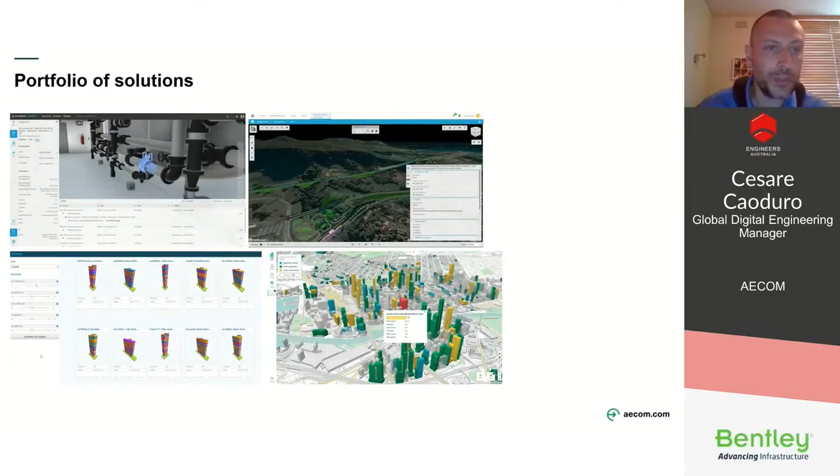It's all about harvesting this information, managing this information, attaching this information to a piece of geometry with different levels of detail. It doesn't really matter the level of detail at this point in time, but it's about being able to produce a representation of both geometry and information. Everyone is coming to a different place during the life cycle of the projects - some are in the concept stage, some are more in the construction stage. But at the end of the day, it's really made by three components: geometry, data, and representation of the data.

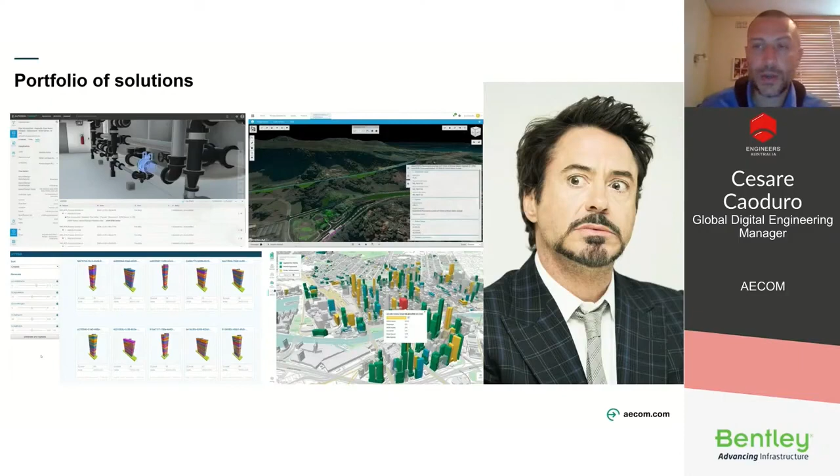For me, this all looks very scary because you can really tackle the problem from different perspectives. So I would say there's not a perfect solution to represent and collect this information. It's very project-related or very client-specific, the way you want to manage design information and present it as an end goal. So I'll probably concentrate a little bit more on the geometry side of things and on the data side of things.

So let's start with the geometry. For me, this is probably the biggest piece of the cake. You can't have a real digital twin if you don't have a geometry. And if you don't have data and you have only geometry, that's not a digital twin, because data is all about.

So let's concentrate a little bit on geometry. I'd like to talk about computational design and how we can use it to speed up the process of creating geometry towards the idea of having a digital twin. We'll focus specifically on structures, so I'm very civil infrastructure biased. The two examples I'm going to talk about are around retaining structures and tunnels.

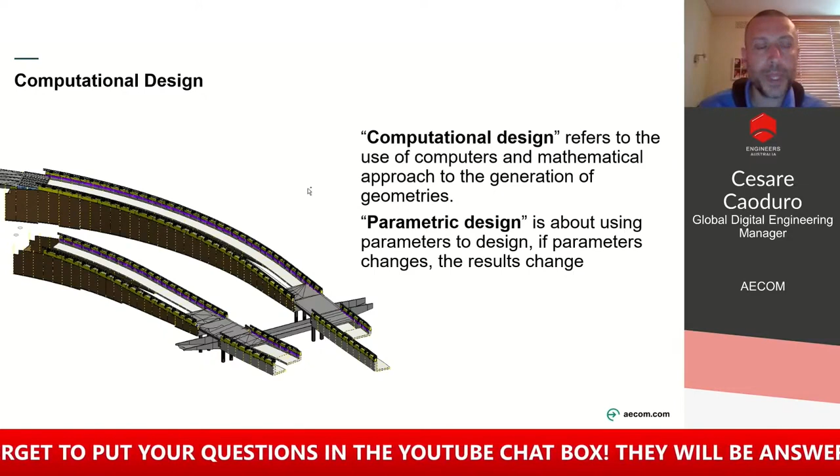Both of them coming from well-known projects around Australia. I can't really mention one of the two projects, but it's not relevant to this presentation.

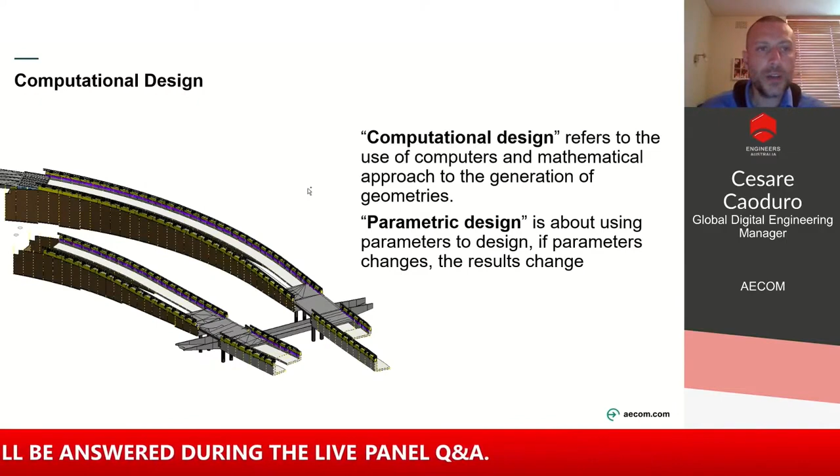So for those of you not really familiar with computational design, what is it? This is really another buzzword like digital twin these days. For me, computational design is like back in the days with a calculator. You have numbers on one side, you type those numbers, you have an equation on your calculator, and then you get numbers on the other side.

Computational design or parametric design, depending on how you want to express the constraints between geometries, it's literally the same thing. You have numbers or geometries on one side, then you have a black box with rules, constraints and mathematical equations, and at the end of the day you get on the other side some other piece of geometry or some other piece of numbers. So it's having inputs, some manipulation of those inputs, and then on the other side you get outputs that can be inputs for another piece of the workflow, or can just be the end result—think about, for example, a structural analysis result.

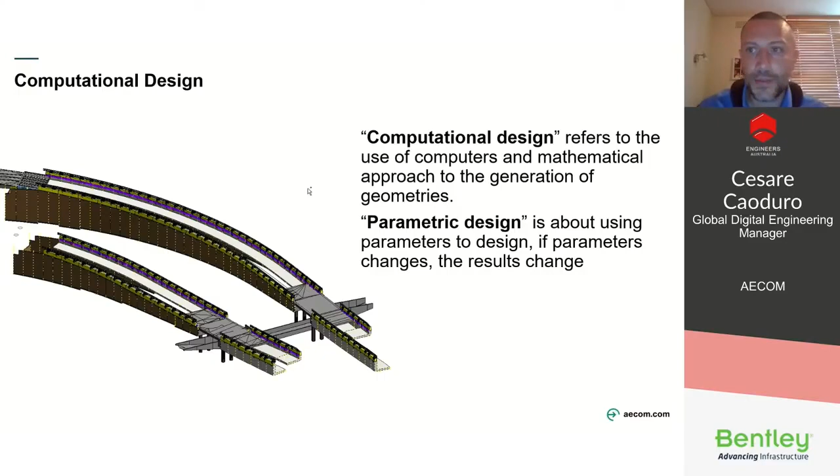There's different platforms and different ways to approach computational design. There's definitely an easier way, which is around using visual programming. Visual programming today is very popular, becoming much more popular within engineering firms. It's really being able to use building blocks graphically to build complex workflows.

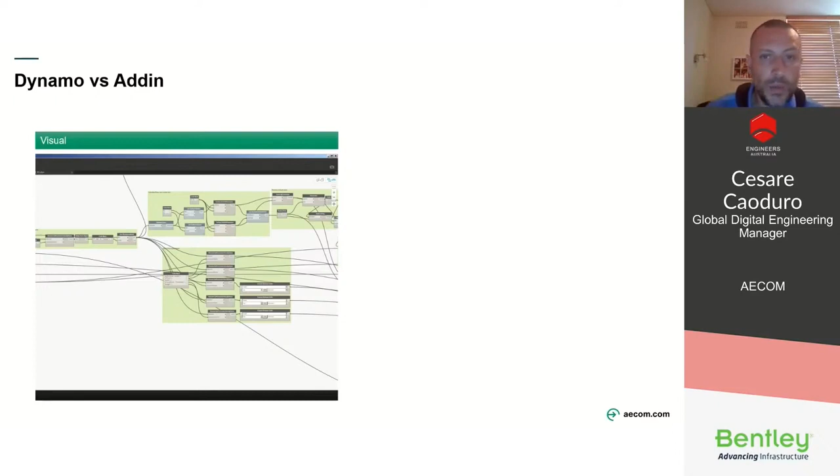If you think about an equation, you can have your variables, then all your rules—addition, multiplications, whatever the rule is going to be—and then on the other side you have the equal output. Instead of writing that with a very complicated formula, you can use building blocks and connect those with connections. This is a typical example of a visual programming workflow, which is much easier to understand, read, and extend compared to traditional code.

You can still have traditional code within visual programming, but it's definitely less compared to a fully fledged traditional plugin. So there's an easier way—the learning curve is less steep compared to programming code, and it's much more visual. It's easier to understand even when you come back after a few months on the same workflow.

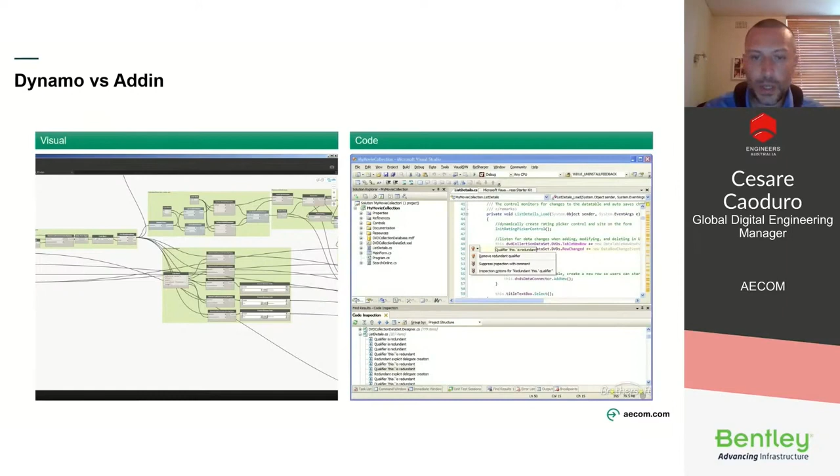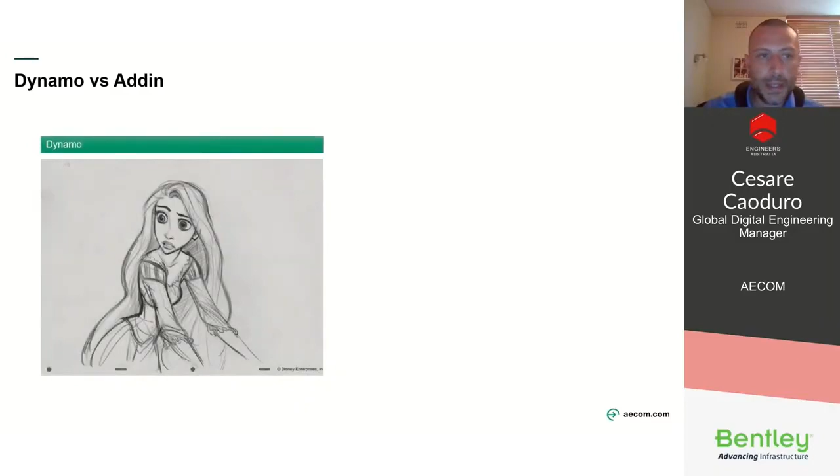So let's talk about this now if we move to the next slide. For me, using computational design and visual programming is literally like sketching on a piece of paper. I love this slide because it really represents the full idea.

Visual programming is really sketching with a pencil. Once you're happy with the sketch, you can move into a more production environment and build a plugin using a programming language like C# or Python or whatever it's going to be. But the difference is, when you're within the visual programming environment, making changes to your workflow is much easier than making changes when you have a fully fledged coded environment. So that's the full idea of using this slide.

What I'd usually like to say is that when you have great powers, that comes with great responsibility—and by the way, that's not from Spider-Man, it's from a French writer called Voltaire. Spider-Man just borrowed it. And everything looks impossible until someone does it, which comes from Batman. As you can imagine, I'm a huge fan of comics.

Computational design is very powerful, but it comes with complexity. You can use computational design to solve very complex problems in engineering—like parametric geometry modeling, form finding, automating design processes. Think about panelization in very large and complicated facades, high-rise optimizations when it comes to buildings, and of course structural facade engineering.

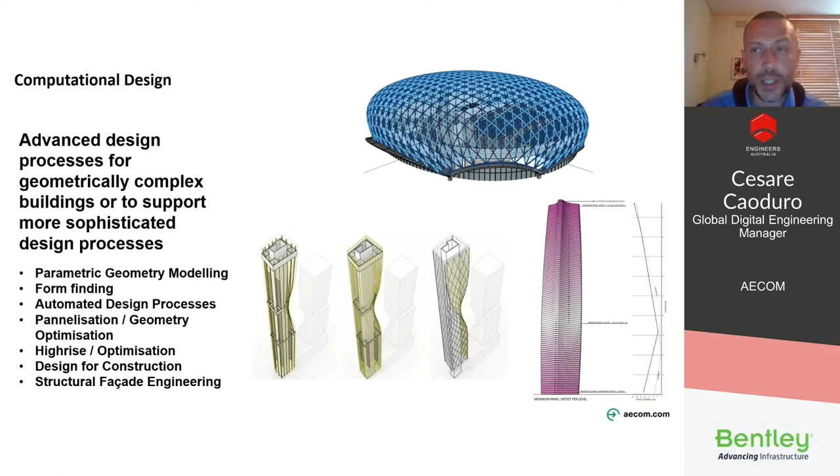Going back to the process, it's very simple. You start with some design idea and criteria, then you go into the engineering piece of this design criteria, then you move into more detailed modeling. And at the end of the day, we all want to see drawings and models coming out from these models, driven by data within the process.

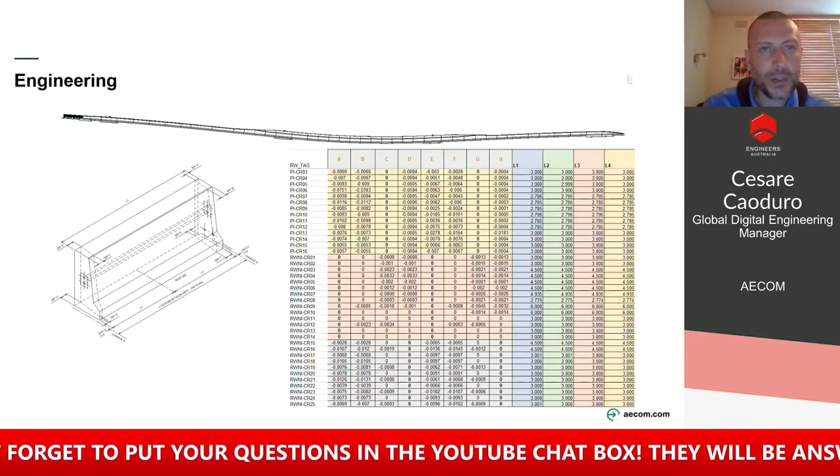For me, this is really another interesting picture that defines the transition from what was the world before computational design and smart objects, and the world that we are moving towards now with digital twins and smart objects.

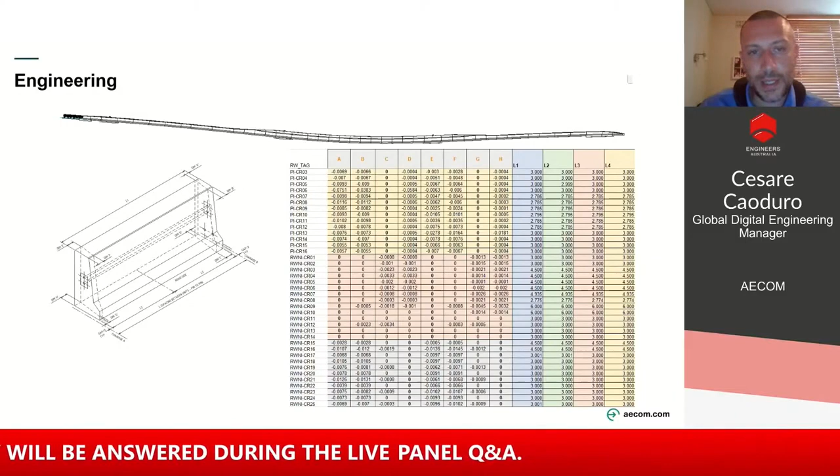The picture here at the bottom right is an Excel spreadsheet. Who doesn't love Excel? We've been running projects for years, and we're still running projects and structural analysis literally based on Excel. And Excel is an example of a digital twin, because it contains information about geometries, about assets, about location, all types of information. At the end of the day, you can present that information in a very simple form of a database, because Excel is a database at the end. It's not relational, it's not a complex database, but it is a database.

What we're moving towards is more the object on the left side of this slide, which is a smart object. The smart object includes all the relationships that we have built into thousands of Excel spreadsheets, probably in just one single object. So the object is clever enough to understand how to stretch and how to flex depending on engineering criteria.

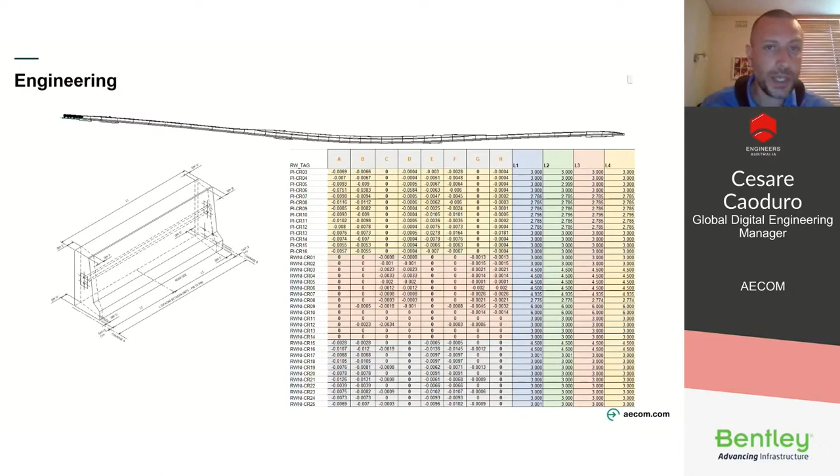Then, using computational design, we can put together more smart objects, and they can all be combined into complex structures, and then provide the right information for different stakeholders, being structural engineers, project managers, or construction managers, depending on who is looking at the model from a different perspective.

So those are some examples, some screenshots of computational design modeled objects. That precast barrier you saw in the previous slide was part of a bigger picture, a bigger model that includes maybe hundreds of precast barriers. As you can appreciate from this slide, they all come with very different geometries, different constraints, different locations, which at the end of the day is the geometry within a digital twin.

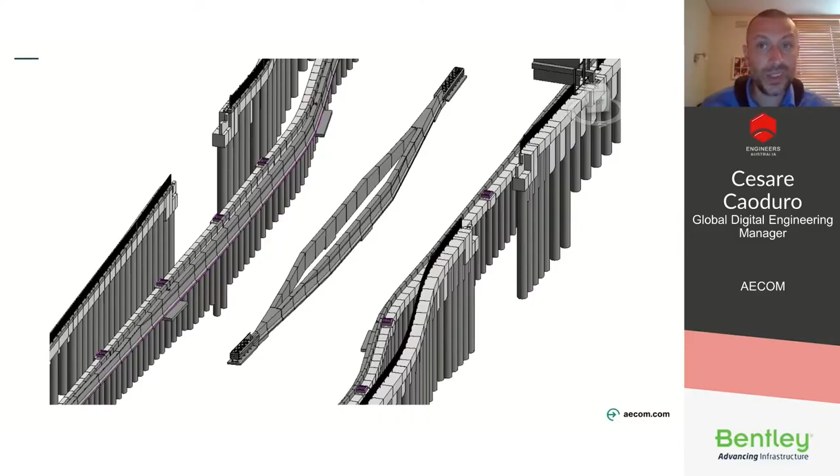The geometry piece of it is basically the representation of that geometry and all the data attached to it, which again will feed different stakeholders depending on the use case you want to get from a digital twin. Those are, again, other examples of retaining structures, all driven by computational design.

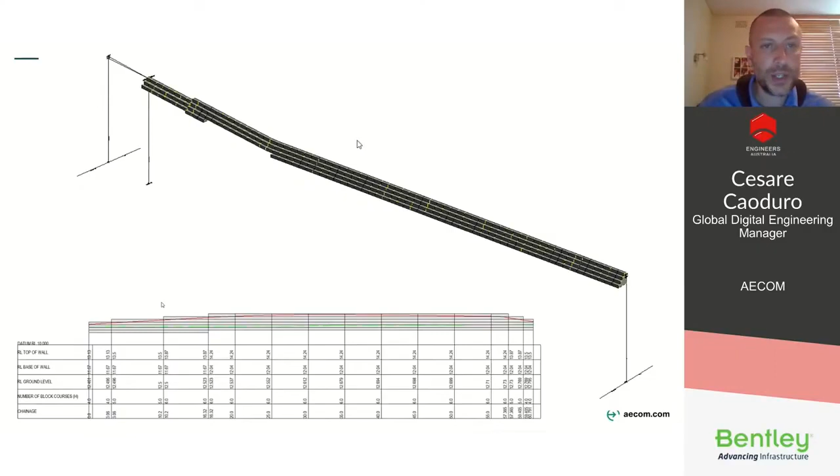At the end of the day, the engineer wants to take some of this information into a developed elevation that might be just good enough for a structural engineer to make some adjustments to the structure, or to get some idea of the structure itself.

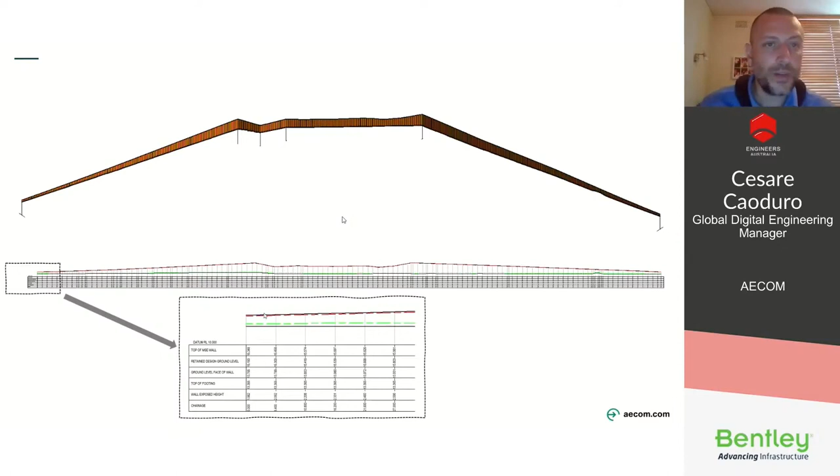Again, another example: this is a retaining wall made out of panels, an RSW type of wall. Same idea - the beauty of it is that now we can get a developed elevation pretty quickly from a model as soon as there's a new design change, which wasn't really possible with traditional methods. At the same time, that model is georeferenced, and we can use it for collaboration, coordination, and eventually finding interfaces with existing structures.

This is another example of a complicated RSW, which transitions into an L-shaped wall and then finishes with a barrier footing wall. You can see there can be huge complexity in terms of shapes and in terms of information attached to it.

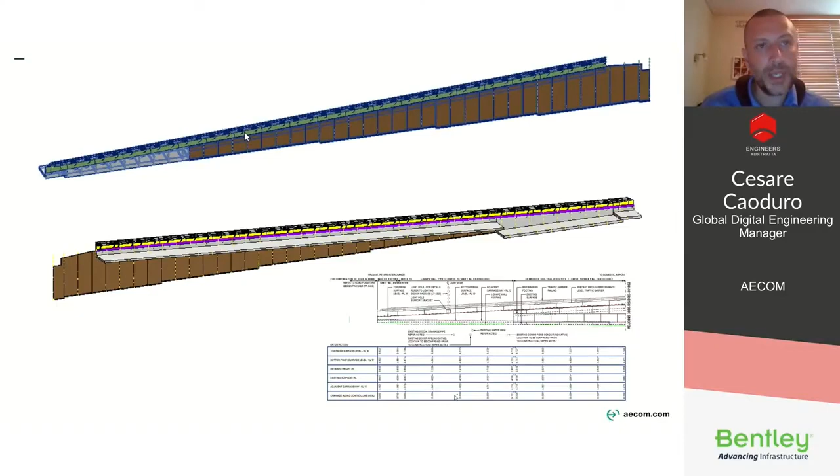So each one of these single panels can be tagged, can be quantified. Each single precast barrier can be quantified and tagged, and also all the railings on top of the barrier can be quantified, manufactured, and then shipped to the construction site with the right information and just installed. Each single barrier comes with anchors and bolts information, which again is part of the big piece of data coming together with the digital twin.

And finally, drawing production. Drawing production has always been completely separated from the model. But what we're trying to achieve today is that drawing production is connected with the model. So whenever we change the model, we get a new drawing out, and we don't have to use drafting time to go and manually change text and information, because 80% of this information, I wouldn't say 100%, but 80% comes straight back from the model as a tag, which is the clever and smart way of demonstrating text.

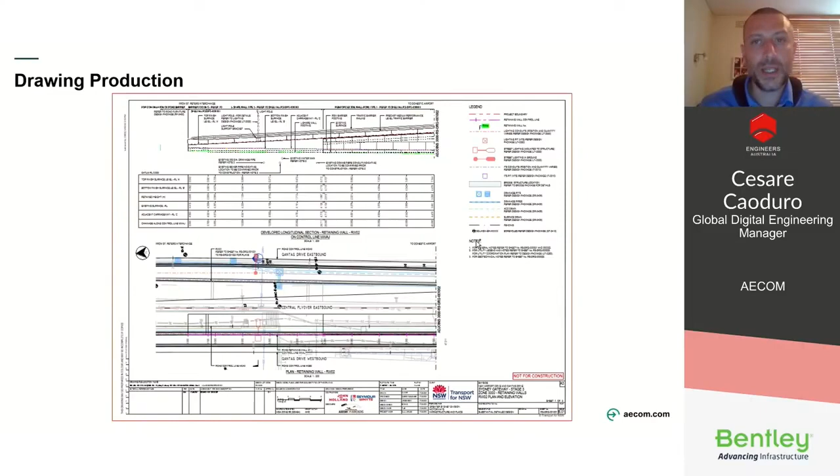So if we change the size of the footing, the associated dimension on a drawing will change accordingly. The volume of concrete, for example, will also change in another spreadsheet or dashboard for the project managers or procurement manager. So everything is well connected, and the model is literally the single source of truth where we attach all this information to.

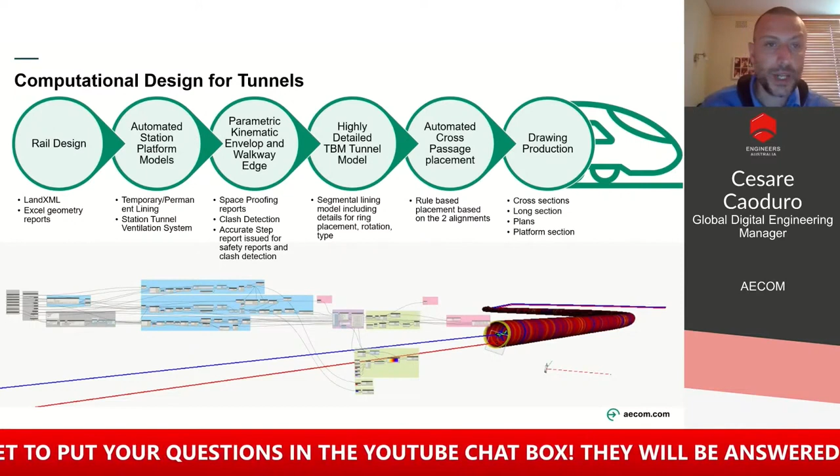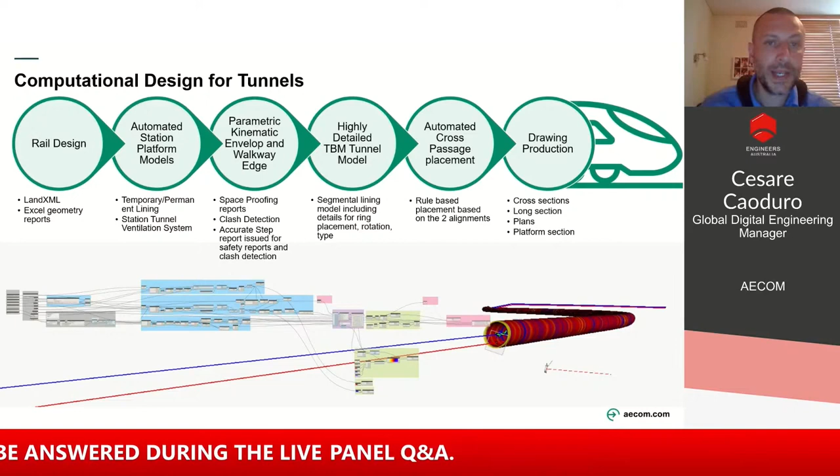So let me give you another example of computational design, this time for tunnels. Again, the process is very simple. You start from the design of, this is a TBM tunnel, and it's a rail tunnel. So you start from the design of the center line of the alignment, and then you come up with the digital representation of the tunnel, which then can lead to different use cases. We use parametric design extensively to iterate the process of creating multiple options of the same model and then extract information from it for different stakeholders.

This specific model was the platform of the station made out of caverns. The main goal of this model was to verify the tunnel ventilation system requirements, which wasn't really possible just with 2D drawing. So we extracted a portion of this model at a different level of detail to provide to the tunnel ventilation engineers to run their calculations and CFD simulations.

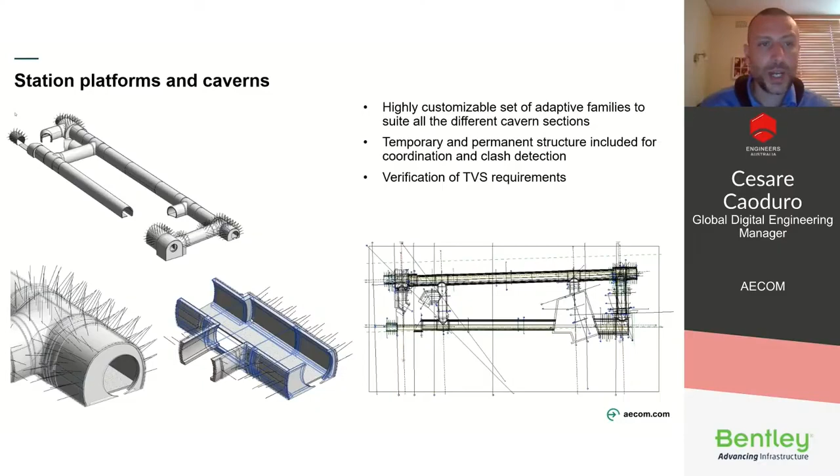But the same model was used by the construction team for staging of the construction and to understand exactly the breakthrough of the TBM, and to simulate basically the TBM passing through the station.

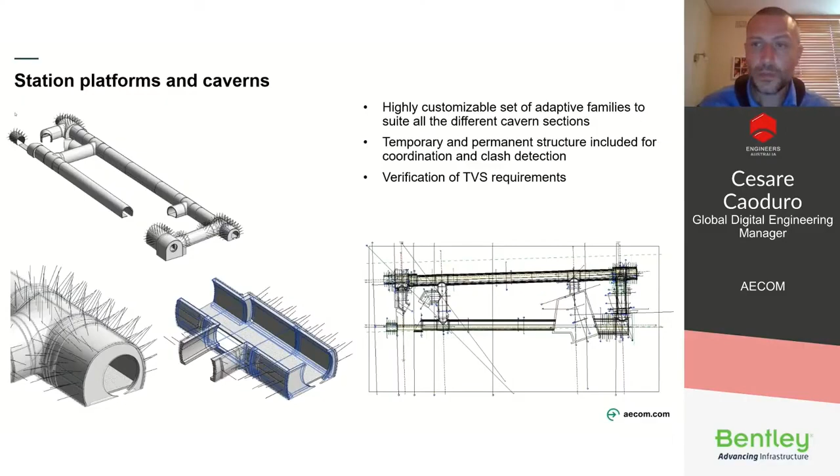So this is an abstract of the TBM tunnel, and the TBM is complicated by itself. The way the rings are placed, the way the rings are modeled, and the information associated with each ring is probably worth a separate webinar by itself.

So we use this to, I would say, mimic the idea of the TBM. Using computational design and a very high detailed model, we have identified the ideal trajectory of the TBM, for different reasons. One being finding interfaces with the existing foundation of existing buildings. Another was to identify the possible location of cross passages and try to minimize as much as possible what would be the ideal path of the TBM.

We all know that the TBM will be corrected and adjusted throughout the process of excavation, but at least this will give us an estimate, used in conjunction with a geotechnical digital twin model. This will give us an evaluation of the different materials we are going to excavate, and eventually we will understand what will be the timing of excavation of that specific portion of the tunnel.

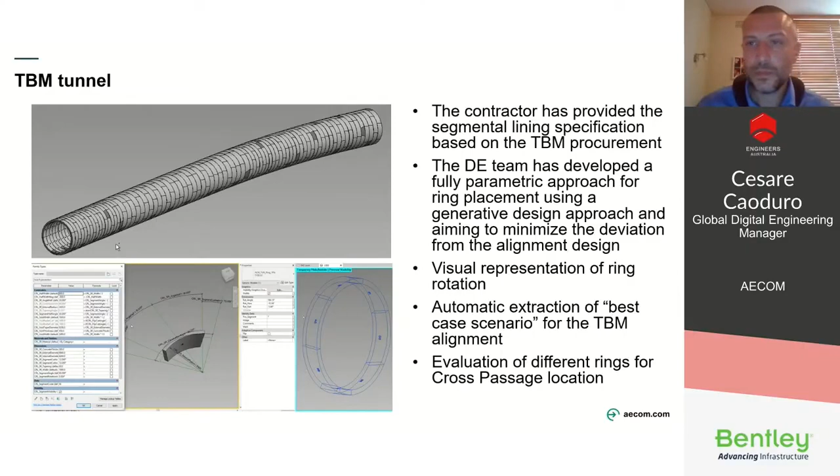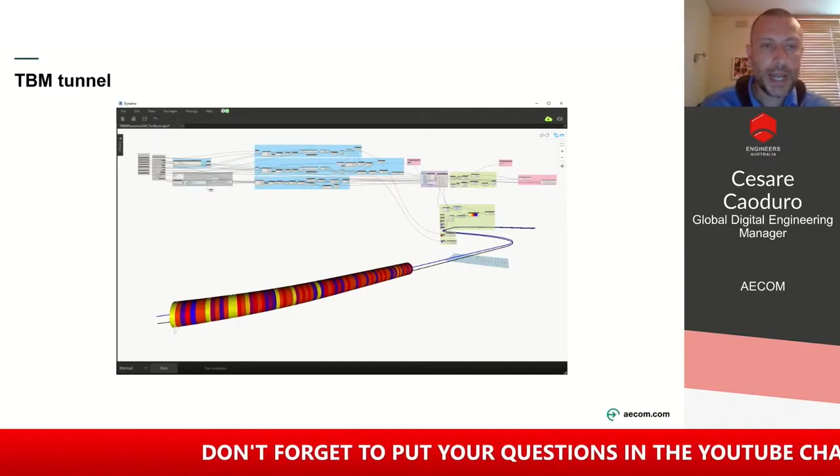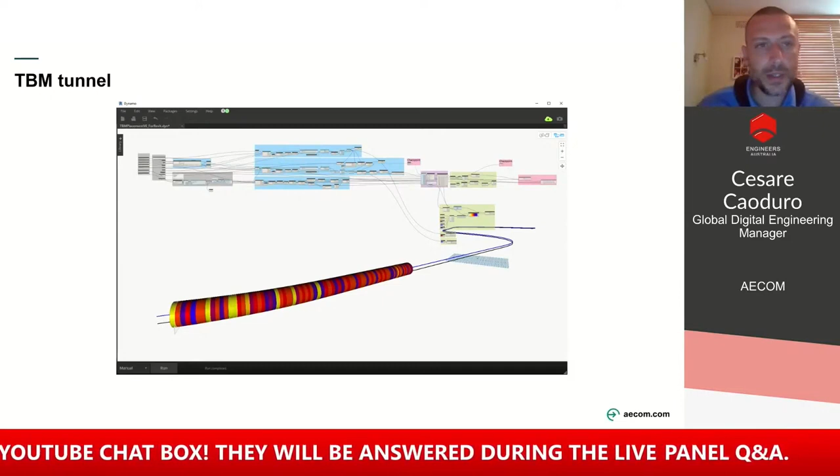So the colors here are not just fancy colors. They give you an idea of the different rotations of the rings and the positions of the rings based on the possible rotation matrices of these segments. But the main idea is that you want to minimize the deviations of each of these rings from the design center line of the tunnel.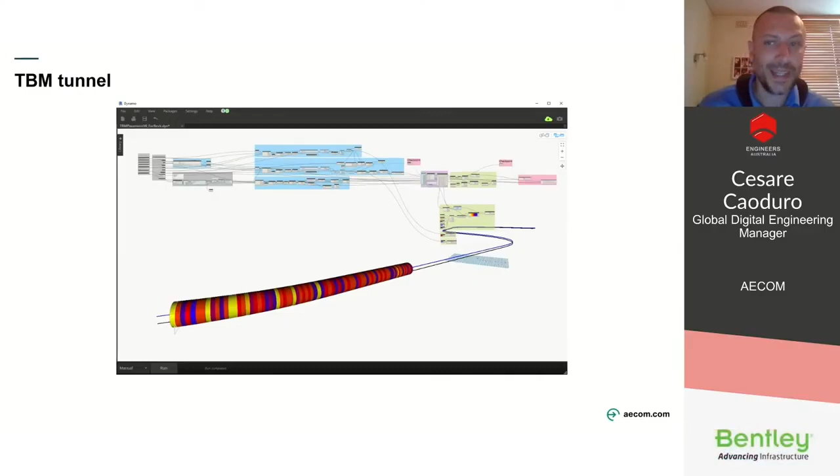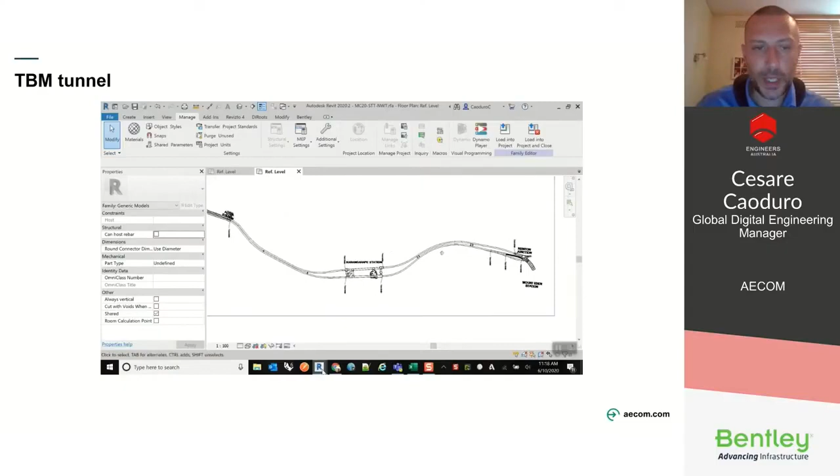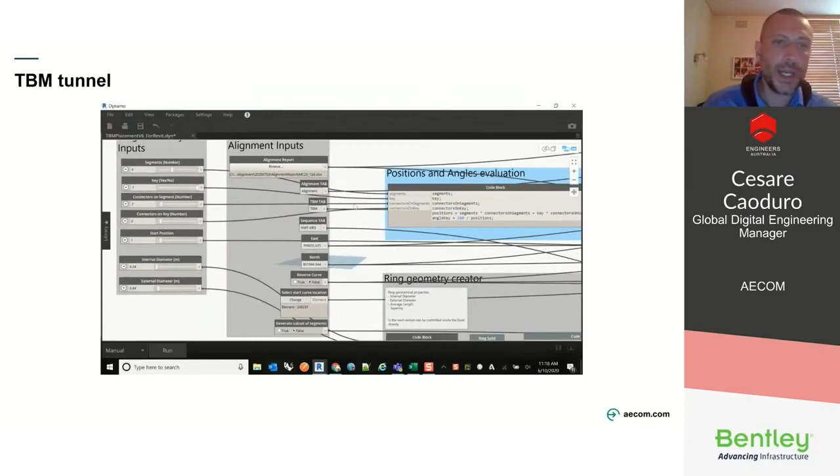So this is a very quick video. I'll probably go fast on this one, but the main idea is again presenting what it looks like to be a very complicated solution through visual programming. This is all a spaghetti connection, but at the end of the day, you really want to change a few inputs, which usually are on the left side of the workflow, and then you have loads of magic happening in between, which eventually are just mathematical or geometrical rules. The flow goes always from left to right, and on the right side of the flow, you'll find all your outputs.

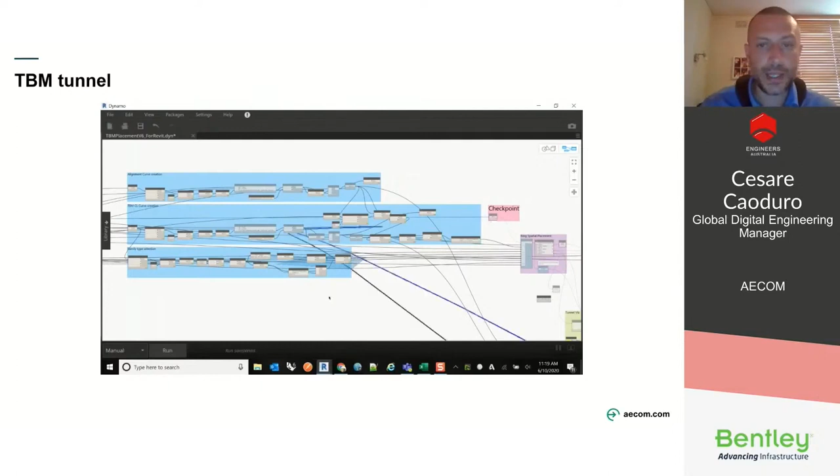Again, those can be just simple numbers if it is a report, or can be other geometries. In this specific case it's the tunnel itself, the model of the tunnel. But then it comes with all the information attached to it.

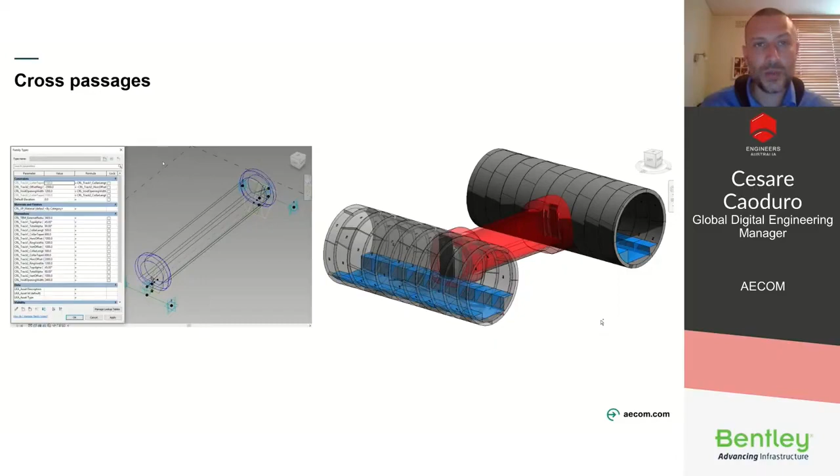Cross passages are another huge problem. You need those cross passages, especially with a twin tunnel connection, and you need to place them at specific distances. You also want to excavate them and cut the existing rings in the best location. Using computational design driven by rules, we could identify the best position for cross passages, identifying a cut of 5 rings as an average, and then determine which of those rings would best fit the cut in terms of location and type. Again, it's all rules that engineers have in their minds, just translated into algorithms the computer can understand and manipulate.

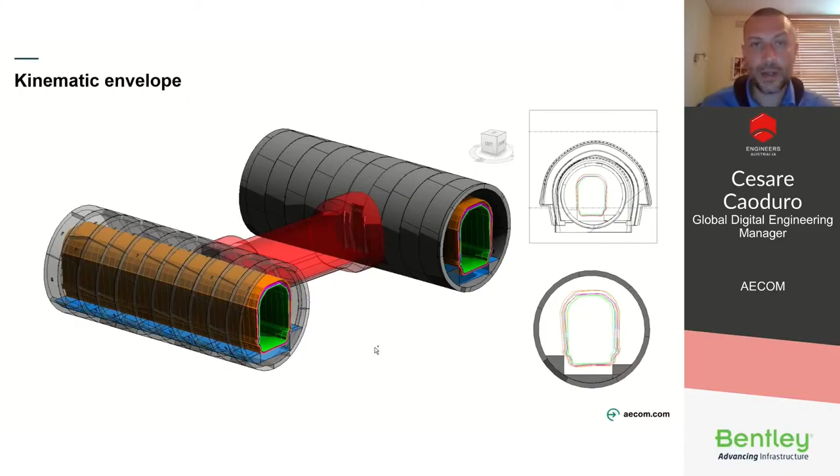Another use case was the kinematic envelope, demonstrating that the rolling stock fits within the tunnel, with no interfaces with MEP. Most importantly, this also helps understand and design the walkway based on the location of the kinematic envelope. Again, all driven by rules, geometries, and data, because at the end of the day we exported a report of the walkway set out.

So let's briefly go into data. This is the biggest piece of the digital twin, I would say. We can have a digital twin without some kind of geometry, and we could have a digital twin with no geometry, but we definitely can't have a digital twin if there's no data attached to it.

Briefly touching on data, we're looking for specific areas when we think about data in the digital twin environment. We want a place to store data, which can be a proprietary platform or an open source data repository. We want to understand data versioning. We want to collaborate on this data based on different stakeholders having different reports. We want interoperability, not only across different personas but also across different companies, especially in large joint venture setups. And we want this data as structured as possible to run business intelligence on top of it, such as construction reports, progress reports, or other report types. We may also want to collect sensor data attached to our digital twin.

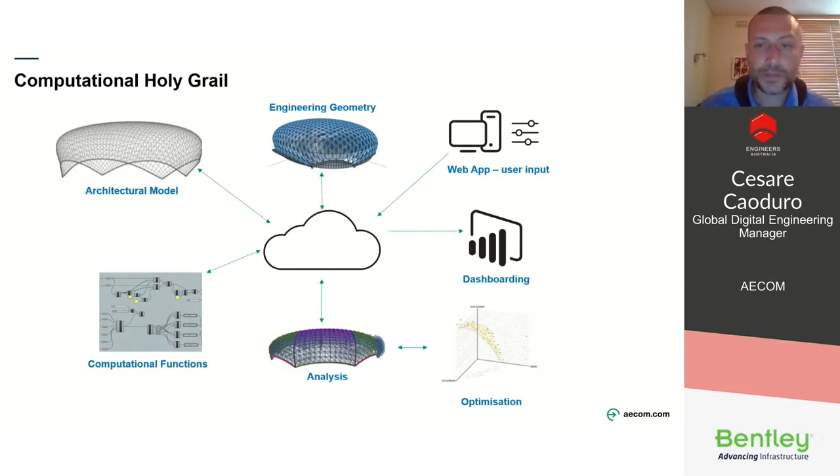So from my experience and lessons learned, computational and generative design are really here already to reduce what I like to call the time to market. Every time there is a design change, we need to produce new information, new geometry, and publish that information and geometry. So computational design can definitely speed up this process.

I would say that designers and engineers having these digital twins in their hands can take more informed decisions. For me, really the model is not anymore the end product, but is the input product for all of these design processes. Sometimes it's not cost effective, and I can get that.

So the first project definitely needs more investment in terms of setting up these environments and workflows, training the people, training the users, and providing the awareness that this is the right way to do it. And then, of course, documenting properly the processes and training and upskilling the users to take into account these new ways of designing.

It's really important - I like to call it always keep it simple. Just to mention something from the beginning of my presentation, always keep a good balance. I saw multiple times creating very complex algorithms, very complex coding, very complicated workflows, but very difficult to change, very bespoke for a project. So try always to break it down into simple steps. Try always to make the algorithm look simple and build your building blocks to then build complex algorithms at the end - this makes it a lot easier to change along the way.

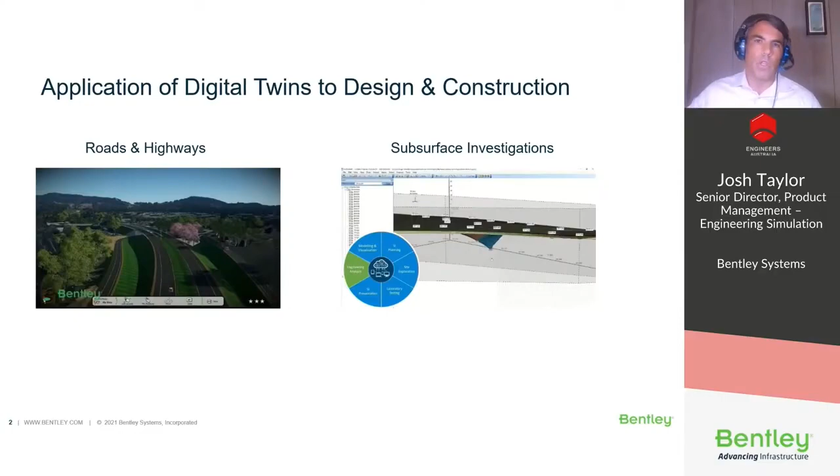Taylor's used the reality captures generated with the ContextCapture product to add the reality meshes to a custom web application that they created. One idea we can take from all of this is how a digital twin is applied to and used by a given construction trade or engineering discipline is still pretty wide open and evolving quickly.

There's something I'd suggest is a little different about the digital twin than BIM or CAD. When we unpack what's important about it to each construction trade or engineering discipline, we're probably going to find differences in what's important to each of us. The information most useful to each trade may vary. The journey we're on is to determine what's the most important data in making structural engineering decisions that impact design, construction, operations, and future renovations or expansions of infrastructure assets.

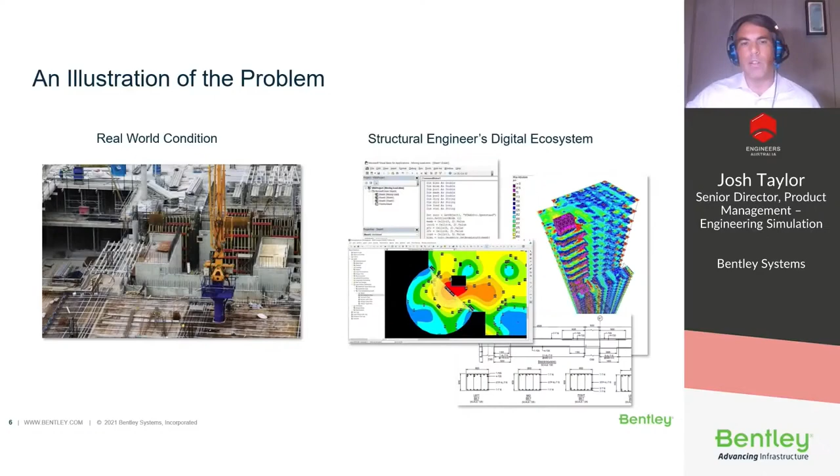So we would propose a digital twin can be this central source of truth and can bring this information together. More specifically, some of the questions that the digital twin can help us answer are: where can I document my engineering decisions so that they are recorded and visible to everyone that needs to see them?

Are they handwritten notes just on calculation sheets? Are they a collection of emails? Is there a better way to organize that information? How has the structural design evolved over time? Do I have a clear enough and detailed enough history to know why changes were made at different stages along the way? Third, do my structural analysis calculations reflect reality?

Are the dimensions, the member properties, the applied loads in my analysis models indicative, within an acceptable margin of error, of the working master model? And then finally, how do I convey my work to those that I am working with?

So with all that being said, what are the ingredients of good technology that would support this process?

First, we want a data-rich 3D model that we can easily navigate. We would like to create custom views of the structure, do walkthroughs, and toggle on and off different structural systems within the model so we could isolate a single floor or a specific framing system and focus our attention just on that part of the structure.

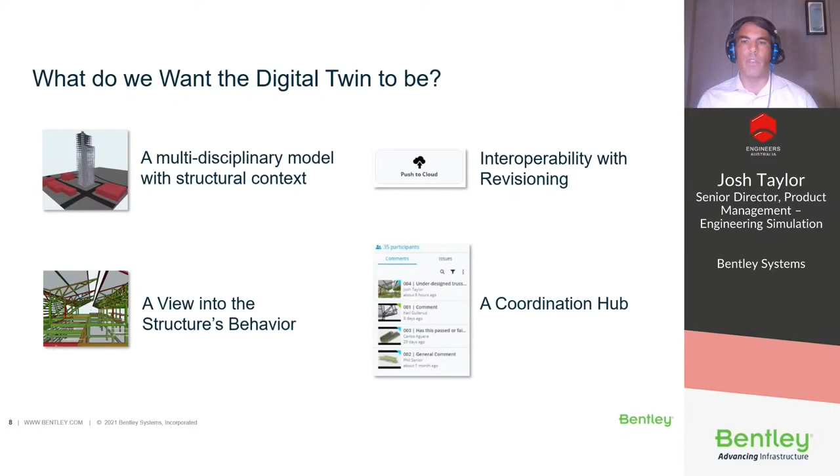And finally, a means of communicating and coordinating with one another in the context of a 3D model where our decisions can be documented.

The platform that Bentley provides that makes this possible is ProjectWise 365. This is really the central point of collaboration where the digital twin exists and all the stakeholders on a project contribute to and interact with it.

It is hosted on a web browser, so there's no special software that needs to be installed to take part in the collaboration or workflows, other than the desktop products you're already using. You just need to be given access to the project by whoever is administering it.

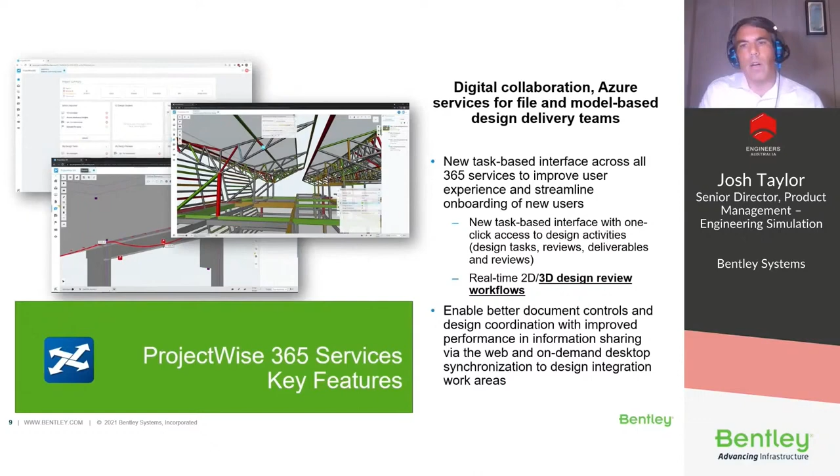There are several facets to ProjectWise 365, but I'd really like to narrow in on the model review and give a feel for how the engineering analysis models that you create are utilized in this environment.

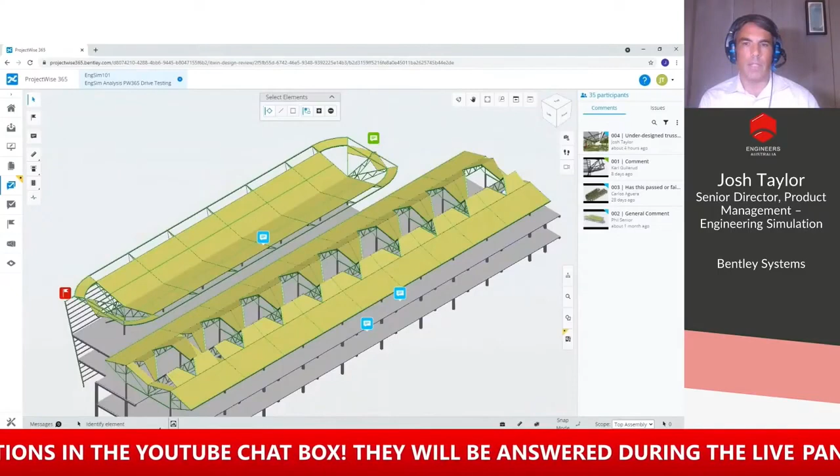So let's take a quick tour of the experience in ProjectWise 365, focusing on the model and design review aspect. This is the ProjectWise 365 site, and we're looking at a structure that we modeled and designed in STAAD, a rail station in this case.

It has been converted to an iTwin and includes analytical results, and that's key to the workflow here. I have a few different saved views that I've captured, so I can get to what I want to look at very quickly. These views can have whatever portion of the project or structure you're interested in isolated.

The analysis software like STAAD or RAM is able to classify the different parts of the structure so that you can easily get to them.

So let's do a quick walkthrough down the boarding platform here, and I'm going to stop eventually and pan over to this little blue comment icon attached to the truss on the left-hand side. This is actually a link to a conversation I've started that all other team members assigned to this project can see and reply to.

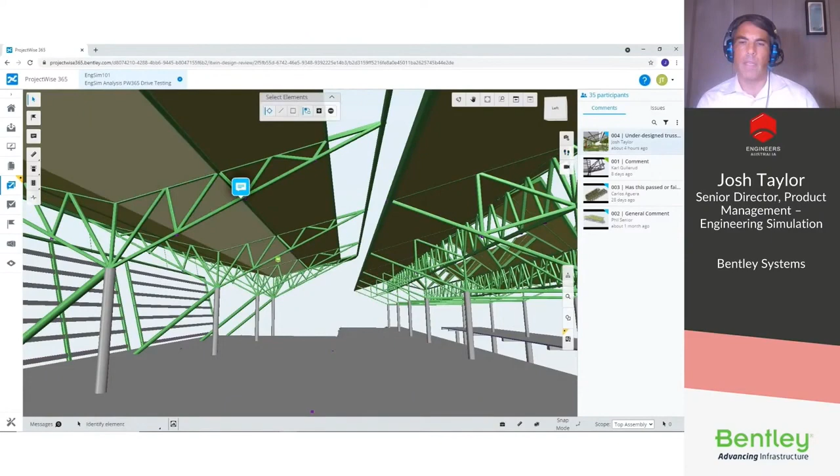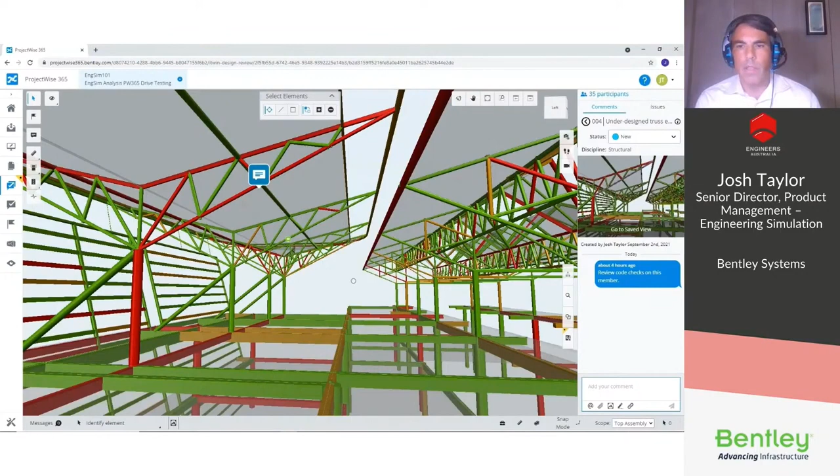When I select it, I see the conversation thread pop up on the right-hand side. You'll also notice the elements in the structure turn to a range of colors. These colors represent the utilization ratio of these members as they were designed in STAAD using the steel member design feature. This is the context-specific information we can query here in the digital twin.

There is an analytical-specific menu we can access where you can display whatever information the desktop application has handed to it: the controlling design clauses, the controlling load combination, and the utilization ratios. Again, this information will change based on whatever publishing application you're using.

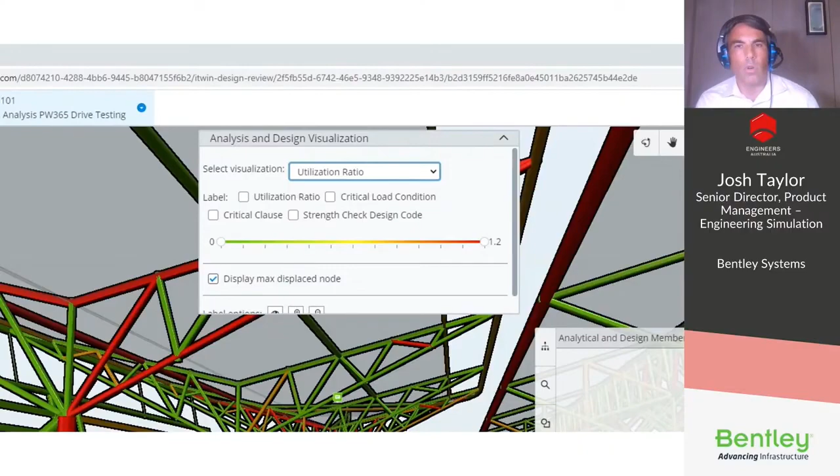So if you were designing a post-tension concrete floor in RAM Concept, you'd see results on the PT design available. If I click on an individual member here, I get a window showing more specific information, such as design loads and more specifics on the design parameters. So you can very easily investigate individual members and how they're behaving within the overall model.

Now, going back to the question of what we want the digital twin to mean for structural engineering, this is the view into the structure's behavior. And if you think back to that building site we were looking at, this allows us to more easily answer the question: how much reserve capacity do we have in the system?

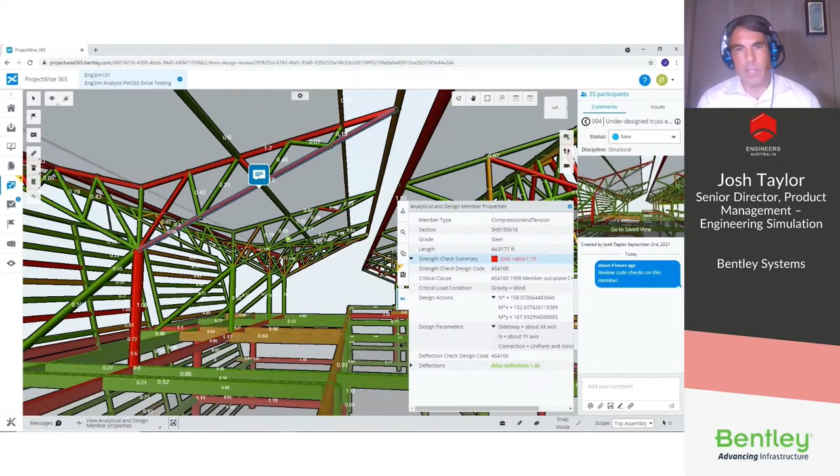What parts of the structure would be sensitive to construction changes? How easily can future expansions be accommodated? These are all easily answered and reviewed by anyone in this type of environment, which really does a lot to democratize the engineer's information and makes it far more accessible.

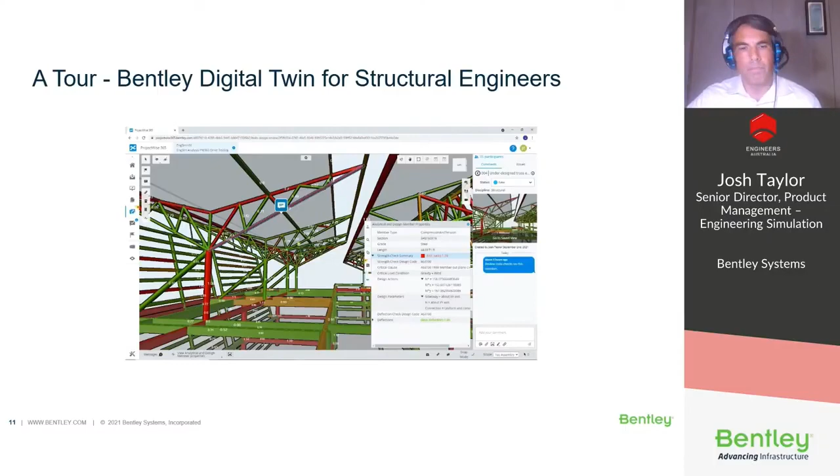There are also simpler ways that we can use the review tools here, in more of a classic design review context. In this screen grab, we're color coding each of the elements in the structure according to their section profile. This gives a reviewer, perhaps a project manager, a principal, or a building department reviewer, an easy way to validate the assumptions made by the design engineers in the analysis models. That's another example of what we mean when we say the information is no longer hidden. What otherwise might be tucked away on someone's desktop is now front and center and available for back checking.

Note that really any of the quantities in the menu here can be color coded. So as an example, another useful application of this might be to check the material strength assumptions in a multi-story building construction, to ensure that the concrete grade is consistent with what is specified on the drawings.

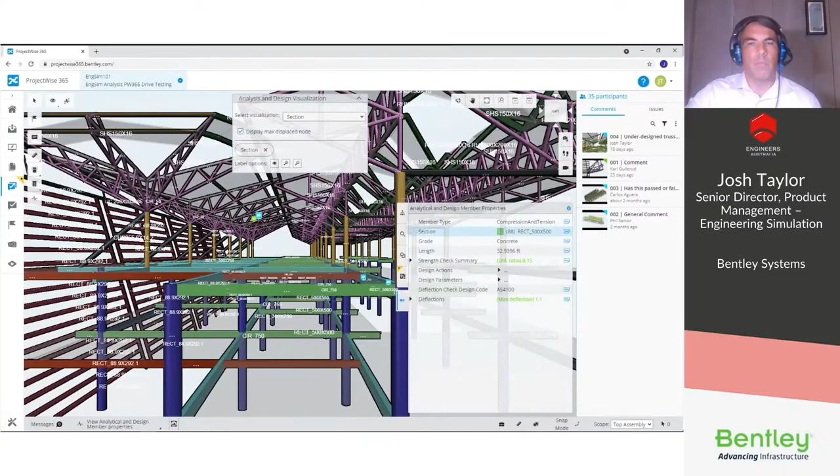So you might ask, how did we create the digital twin in the first place? Well, it can be created directly from the RAM, STAAD, or MicroStation models that you've created on the desktop. We tie the desktop programs to ProjectWise 365 with a common interface, which you see in the center of the screen. This accompanies the desktop software and manages the communication between the analysis model you're working on and ProjectWise 365, where the digital twin lives.

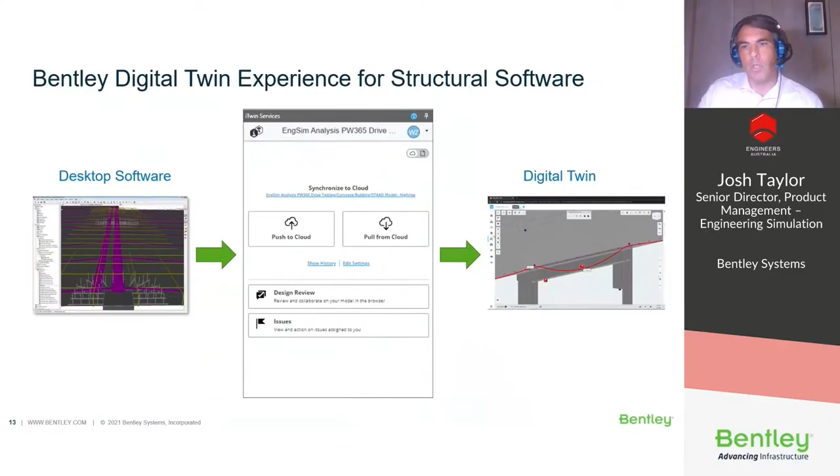You publish the model simply with a push command, and since the workflow is inherently bidirectional, you can also pull from the digital twin back into the analysis program.

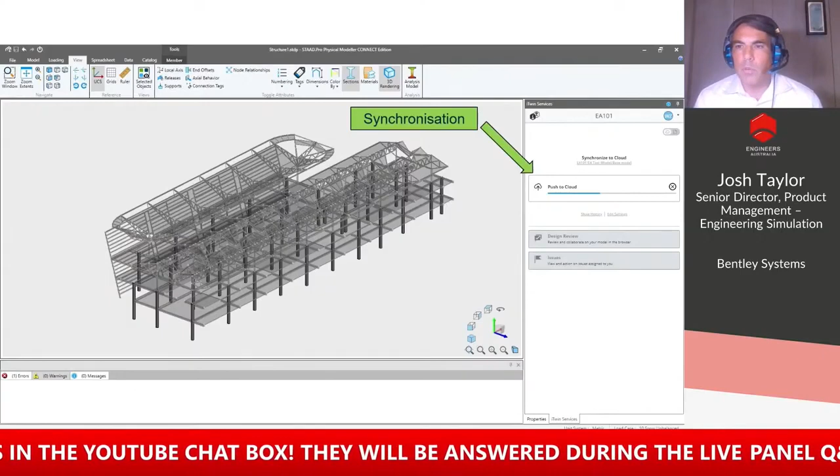So I'll show a simple sequence here on how the push and revisioning works. Suppose that in this STAAD model, we upsize the structural columns at the bottom of the model. What we would do is simply save. After we've rerun our analysis and rerun our design checks, we'd do a save, then press the push button in the little widget on the right-hand side here, and this will update the digital twin.

If we'd like, we can review at this point how the new and previous models compare to one another before we actually commit the change. This is an intermediate interface you can bring up if you'd like to do differencing on any two states of the model over time. The color coding tells you what elements have changed, and the details are shown in the pane to the left.

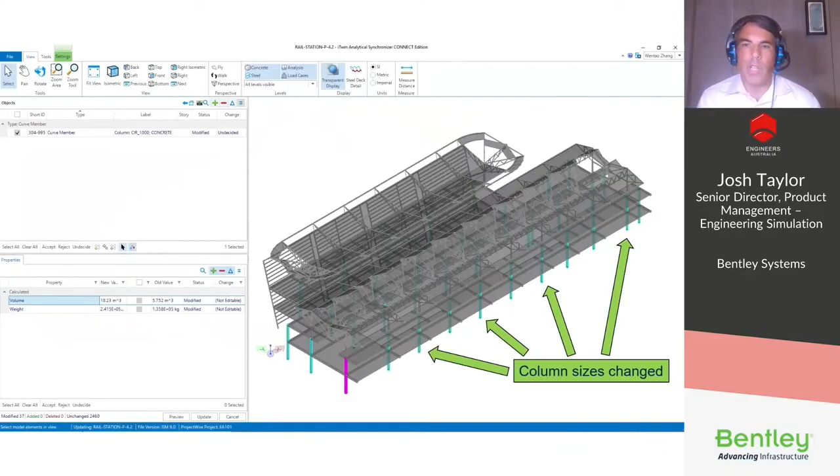And you can be selective in what you want to push to the digital twin. If there are changes you've made in the analysis software that would be superfluous to other disciplines, you can simply reject those specific changes and commit only what's needed for the entire workflow.

I think it's worth reviewing the change management aspects of this a little further. This is a very important and powerful ingredient in this technology. Each time a push is done from a desktop program to the digital twin, it's updated with a revision state. And this is more than just a marker—it's actually a model that we can recover and roll back to anytime we need.

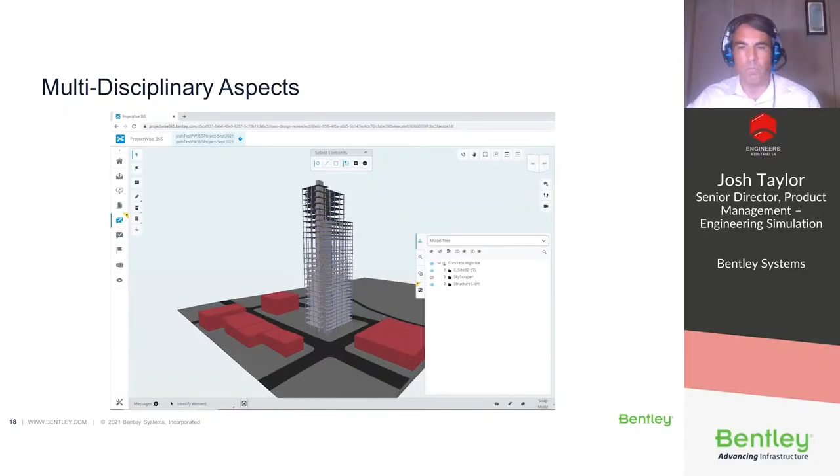So what are the key takeaways of all this? Well, I think the first is that the digital twin, as we see it, can really expose structural engineering data that is more important in decision making that really is otherwise hidden in our day-to-day work. And while this information can be a range of things, we believe one of the most underutilized sources is analytical and design information describing the structure's response under loads and compliance with building code checks. And with a set of applications that are well integrated with the digital twin, we can use this information in more ways that are useful to structural engineers and the stakeholders they work with.

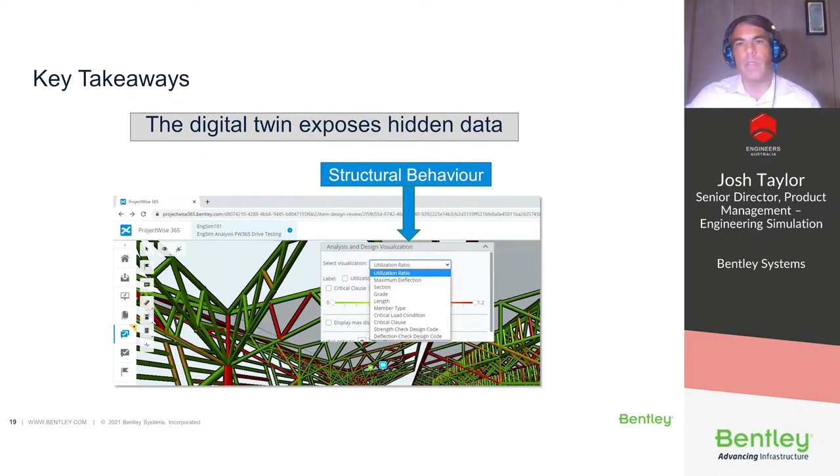The second takeaway is that the use of the digital twin as a central coordination hub, where discussions, assigned tasks, and decisions that would otherwise maybe be lost in email threads, can be consolidated in the context of a 3D model for easy visual reference.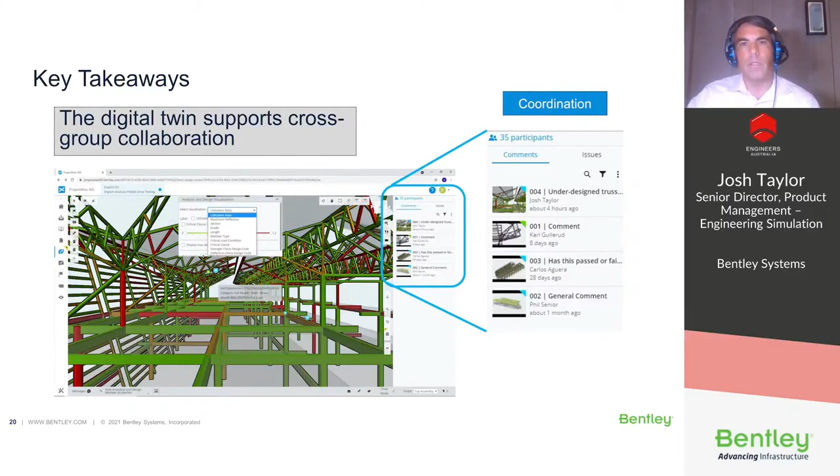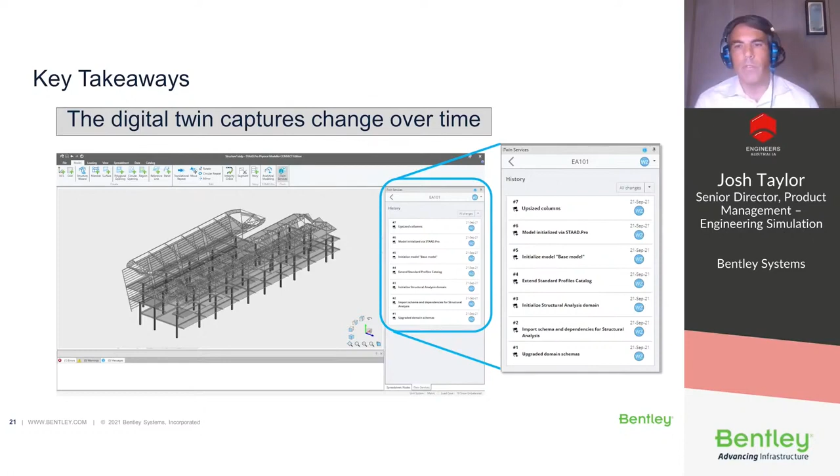And the last key takeaway I would offer is the ever important timeline of change that is stored as we make changes to the models, with each point in the timeline being a complete description of the model that we can restore or query at any point. This gives us the ability to interrogate the design at any stage along the course of the project, or even the lifespan of the asset itself.

Okay, so this is a brief overview of what we've been working on. The workflows we've demonstrated here will be available in an early access program starting a little bit later this year, and this EAP will be free of charge to participate in. I also want to mention that the product manager overseeing much of what you saw here today, and who is among really the most active and passionate in developing these workflows for our industry, is based in Sydney.

His name is Wentao Zhang. He's located in our North Sydney office. In fact, some of you may be speaking with him already about this very technology and already helping shape it. If you are interested in participating in the EAP, feel free to send me an email with the subject EAP and just reference this webinar. We're happy to work with you to get set up once the software is available a little later in the year. I believe we'll have a question and answer session now, but I just want to say really quickly, I highly encourage you to reach out directly to us, directly to me. We'd love to hear your experiences with the digital twin and where we need to go from here.